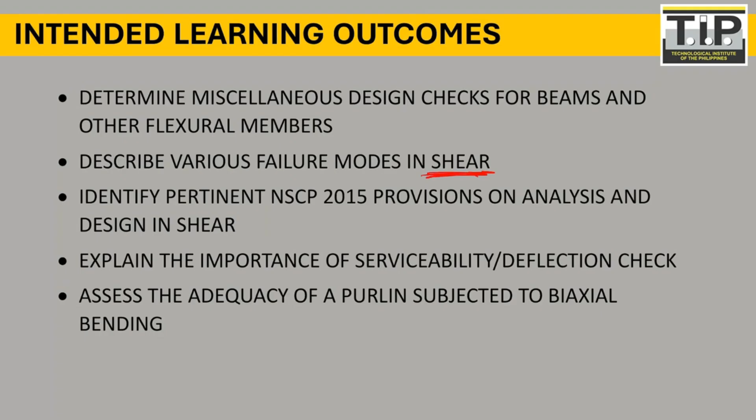The next one is to describe various failure modes in shear, so we're going to talk about shear. Next is to identify pertinent NSCP 2015 provisions, as usual we're going to refer to NSCP 2015 on the analysis and design of beam shear.

We're also going to explain the importance of serviceability and deflection checks, and talk about serviceability and deflection. And lastly, we're going to talk about how to design.

This is a very important topic. We're going to talk about how to design a purlin, specifically how to design the purlin in a simple house, basically yung nilalagay natin, roof purlin. Since most of you will be designing a simple house, kung nag-design kayo ng bahay, kailangan niyo ng design ng purlin, no?

So let's talk about shear in beams. When a member is subjected to bending, kapag nagkaroon tayo ng bending stress, the longitudinal fiber of the beam actually experiences shear stress.

So what do I mean by that? If we imagine the bending of the beam, from this straight beam it will bend downward, tama po ba? Then if we look into the fiber of the beam, this beam is actually having a shear on top. We have compression at the top and tension at the bottom, right?

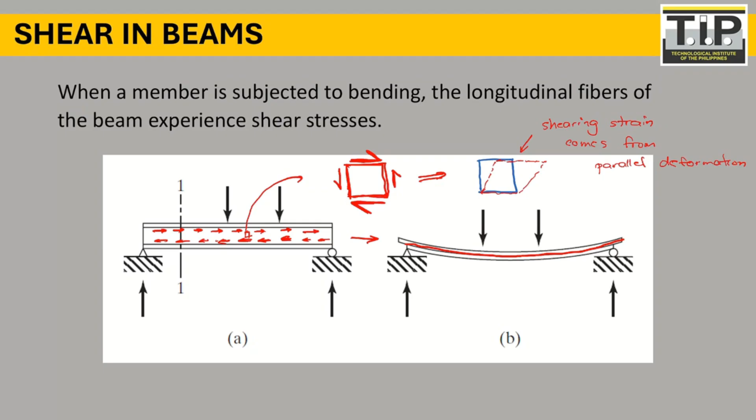Comes from parallel deformation, so it means that your deformation is actually parallel to the application of force. So yun po yung nangyayari sa shearing, that is what happened in our fiber. So if you get that one little fiber, one square fiber in a longitudinal beam, your beam is actually trying to rotate, the fiber is trying to rotate, which causes shearing, yun po yung tinatawag natin na shearing, no?

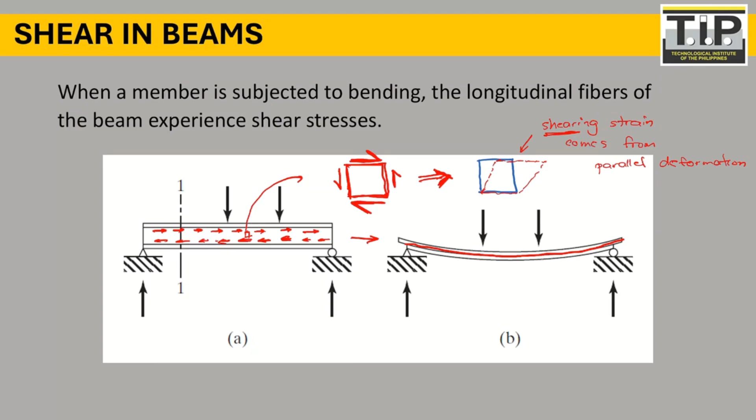So when your beam is subjected to bending, your beam is also subjected to shearing, subjected din po tayo sa shearing. As I've said, if you get one fiber, this will be the fiber, and your fiber is rotating, wants to rotate. You have a horizontal shear and you have a vertical shear.

So of course you know na kapag meron tayong beam, you can draw the shear diagram, right? For example, for that type of beam, this is your shear diagram. So since you know that when you have a beam you can draw the shear diagram, coming from the shear diagram you have a shear force.

So if you have a shear force, you have a shearing strain, ganun lang naman po. Tama? We can relate it to mechanics of materials. So if you have a shearing force, you have a shearing strain. So shear oriented horizontally and vertically are actually equal. So what does it mean? You have a horizontal shear, this one, horizontal shear, and vertical shear.

But as you can see, they are actually equal because they are trying to rotate the member—not the member, a fiber of the beam. So they are trying to rotate the fiber. The vertical shear is trying to rotate it clockwise, coming from vertical shear. And for horizontal shear, it's trying to rotate it counterclockwise. So the fiber is in equilibrium. We need to maintain equilibrium, so it's trying to rotate counterclockwise.

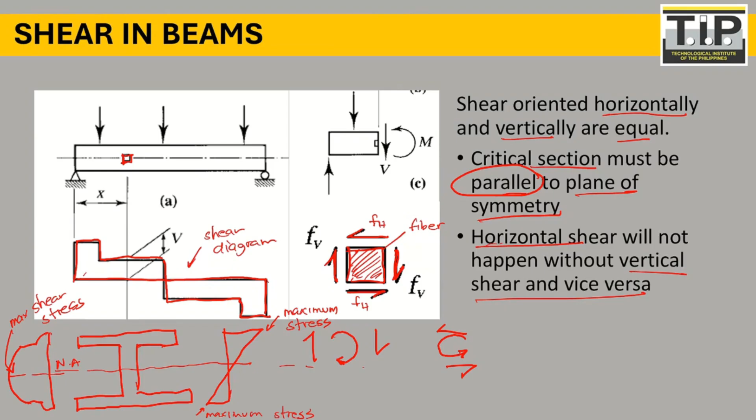So in our mechanics of materials, according to mechanics of materials, our formula for shear is actually given as VQ over IB. This is your general formula. Do you remember this formula? Can I have a confirmation—do you remember this?

Di ba nung mechanics of materials, tinuro sa inyo MC over I. Kasabay po ito ng MC over I, di ba? VQ over IB. Hindi nyo maalala?

Okay, so anyway, if you don't remember, let's have a review in your mechanics of materials. So according to mechanics of materials, simple mechanics lang po, our general formula for shearing stress is actually given as VQ over IB. That is your general formula. And what is V? Basically coming from the force, this is your shear force.

Q, what is your Q? Q is the first moment of area from the neutral axis—first moment about the neutral axis, the area of the cross-section between the point of interest and the top or bottom of the cross-section. So that's the first moment of area. Again, that is the first moment about the neutral axis of the area of the cross-section between the point of interest and the top or bottom of the cross-section.

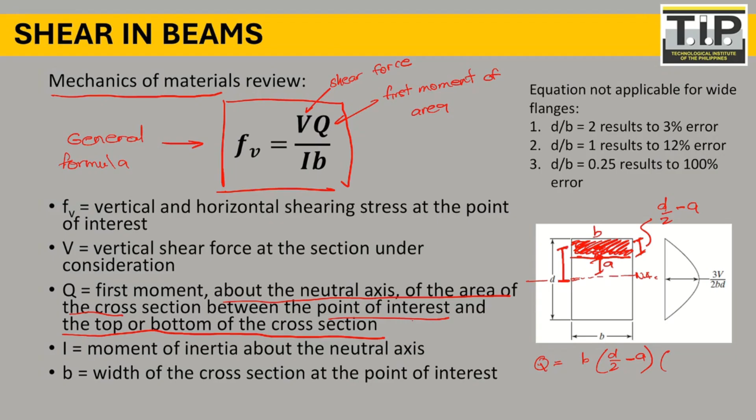So that is the area multiplied by the distance from the neutral axis, coming from the centroid of this area going to the neutral axis. So that will be, let's say, A plus D over 2 minus A, over 2—sa gitna po nung area, at the middle of that area. So you just need to take the moment coming from the neutral axis.

I will be the moment of inertia about the neutral axis. So this is the moment of inertia. B will be your width of the cross section, the width at the point of consideration. So that is our general formula coming from mechanics of materials.

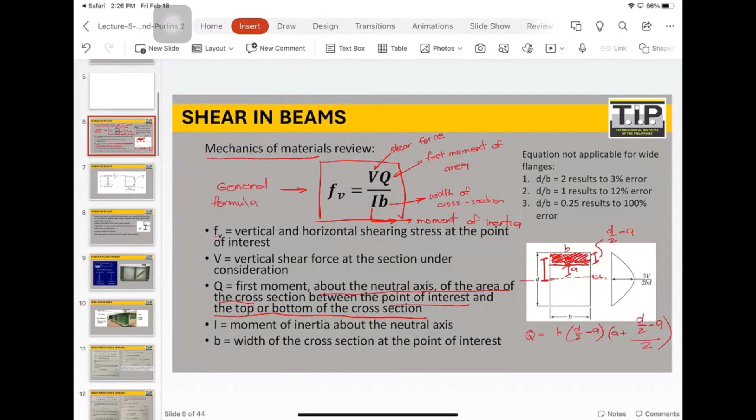I will elaborate more since you don't remember VQ over IB. Let's have a simple example so you can understand the use of the formula. You will also use this in mechanics on the board exam, so formulas like MC over I and VQ over IB are very important.

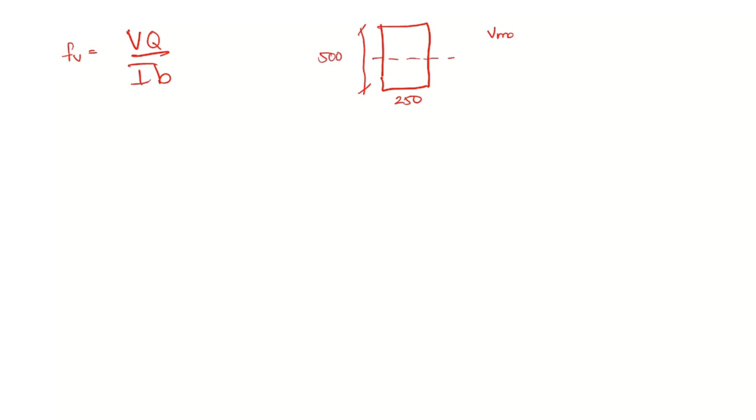So let's have a simple example. Let's say this is 250 and this is 500. Let's say Vmax, or your maximum shear, is 500... actually that's too high, let's lower it.

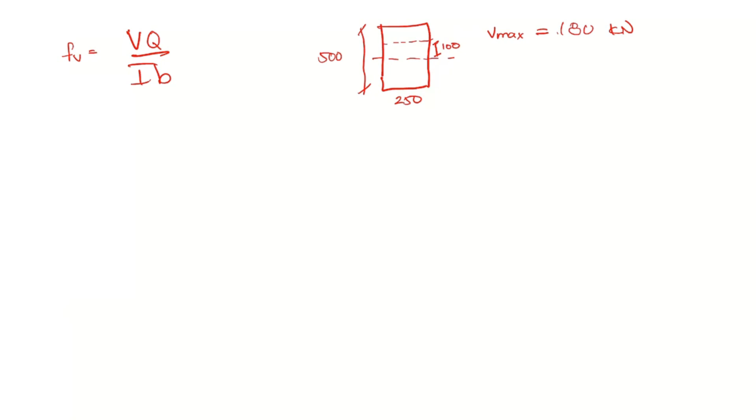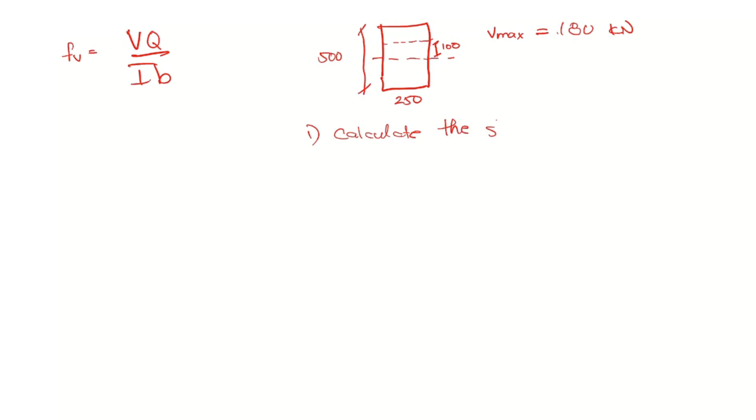Let's say 180 kilonewton. So calculate the stress at, let's say, 100 mm from the neutral axis. First, calculate the shear stress 100 mm from the neutral axis. How do you calculate that?

Let's calculate: FV is equal to VQ over IB. Our maximum shear, V, is 180 times 10 raised to 3. This is a review of mechanics of materials. What is Q? We take the moment of area. Let's say this is 500, this is 250, and we take the moment of area of this section.

If that is 100 mm from the neutral axis, what remains of this distance? 250 minus 100 equals 150. So we have 150 here. Q will be 150 multiplied by 250 — this is the area. Then we take the moment from the neutral axis: what is the distance from the centroid of that area to the neutral axis? That will be 100 plus 150 over 2.

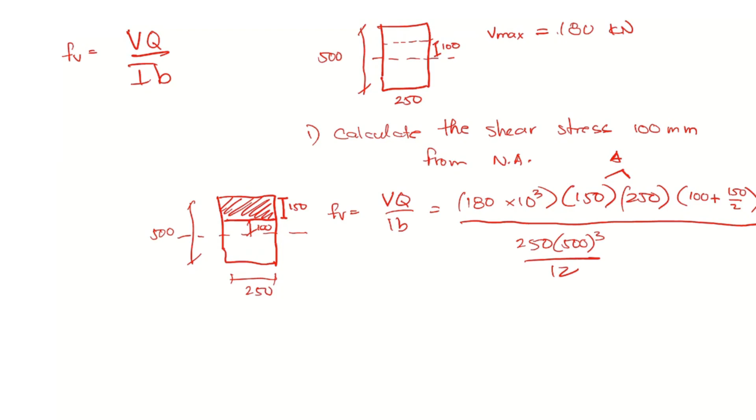Are we understanding this? Okay, again this is mechanics of materials. Then divide by I. What is your I? Moment of inertia, B H cubed over 12. Multiply I by B, the width — what's the width? 250. So that is how you calculate the shearing stress.

What's the value? The answer is 1.8144 megapascal. So again, this is a review, I'm just reviewing it with you.

Number 2, let's calculate the maximum shearing stress. If that's how we calculate the shearing stress, where do you think is the position of the maximum shearing stress?

Where will we have the largest Q? That is at the neutral axis, correct? At the center, so that is correct. If we take the moment at the center, we get the maximum shearing stress. So let's calculate the maximum shearing stress, which will be at the center.

So if this is 500, this is 250, we need to get the maximum shearing stress. That will be FV is equal to VQ over IB. What's our V? 180 times 10 raised to 3 to make it Newton.

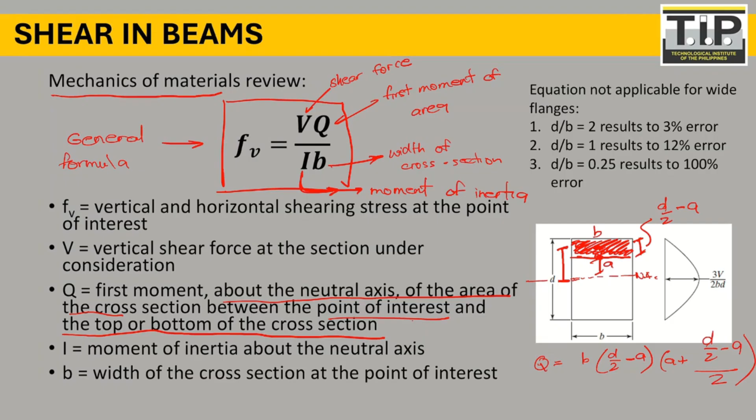Okay, so that is actually the general formula in determining your shearing stress. So that is your shearing stress. So how about for steel? That is for mechanics of materials. How do we relate it for steel?

Anyway, before we move on, if your maximum shearing stress is at the center, what do you think is our shearing stress at the extreme fiber? What is our shearing stress at this point? Let's say at the ends. What's our shearing stress at the ends? We have 0. Sir, bakit 0?

Kasi sa dulo po, wala na siyang kinakapitan. Wala na siyang i-rotate, kasi yun na yung dulo eh. So wala nang magka-counteract. That's why at the ends, your shearing stress is 0.

That is in comparison, kapag kinumpare niyo naman sa flexure stress, ang flexure stress niyo at neutral axis ay 0. Tama? Kaya nga po, in a beam, the maximum flexure stress is at the ends, but the shearing stress is 0. And on the other hand, the maximum shearing stress is at the center with a corresponding flexure of 0. So, ganun po.

Okay, so going back to steel design, how do we relate our formula for VQ over IB in terms of steel design? So FV is equal to VQ over IB, and since our common steel member is I-beam, for simple beams, we have a W shape or a wide flange shape.

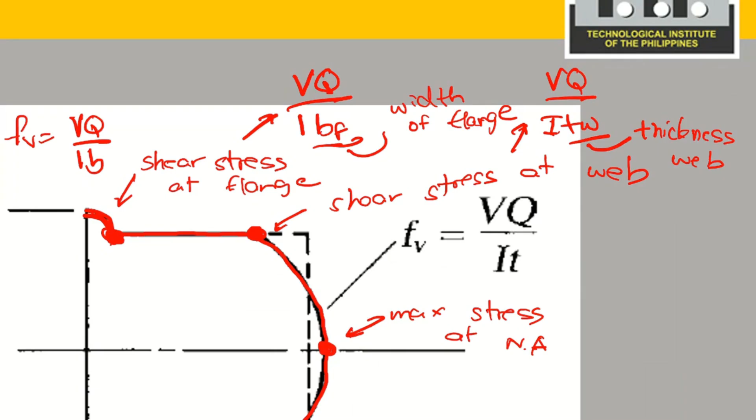That is why if you calculate for, nakikita po ba? So that's why if you calculate for the VQ over IB, you will have a very small stress at the flange and a very large stress at the web. Is that clear? Because of the B. So if we are going to calculate the capacity, the capacity is coming from the stress. Tama po ba? So I think we now understand that the capacity is coming from the stress multiplied by area.

Tama? So if we're going to see this stress part, you can notice that most of the shearing stress is carried by the web.

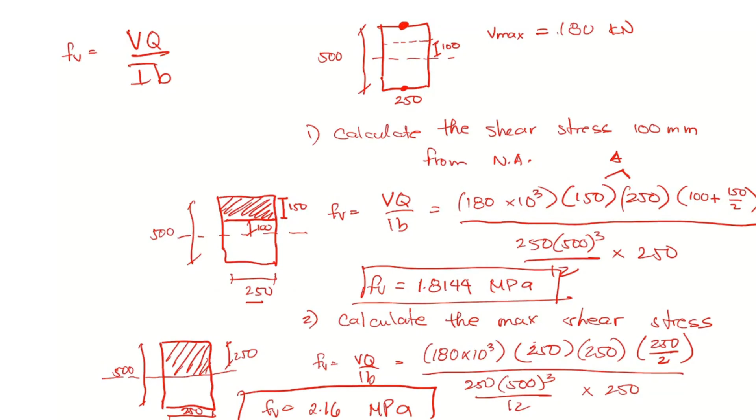So the shearing stress is mostly carried by the web, because it has a very large shearing stress in comparison to the flange. So that is why in steel design, what we did is to get the average stress, because it's a long calculation to get VQ over IB. So we get the average stress instead. How do we calculate the average stress?

We make it as a rectangle, we make it as an average. And to get the average shearing stress, we can just use the formula: shear divided by the area of the web, assuming that all of your shear will be carried by the web. So shear divided by area of the web - that is how we get the average shearing stress. The term for this is your average shearing stress.

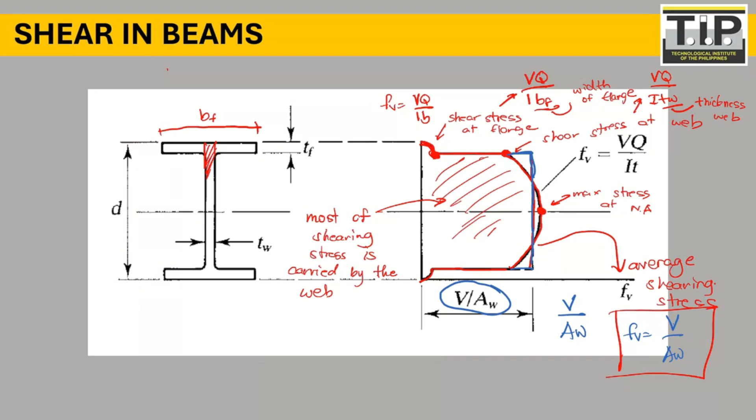Again, how do we calculate average shearing stress? Shear in the web divided by area of the web. So that is by approximation that most of your stress is actually carried by the web. How do we calculate the area of the web? This is the area of the web - area of the web is basically D times thickness of the web.

But take note, where this formula came from is your general formula, VQ over IB - you just get the average. You just took the average shearing stress. And the average shearing stress is given as VQ, FV is equal to V over area of the web. Okay, so are we clear with that? That clear? That is because most of your shearing stress is actually carried by your web, no?

So going into shear of beams - shear is not exactly a problem for steel beams, since significant shear forces can be resisted by the web. So because of the web part, we have a large capacity for shear, resisted by the webs in rolled shapes.

However, very large shear values may be observed when certain conditions occur. These are some of the examples when you have large shear values. If you have a large shear value, your member or your beam can fail in shearing. So this is the time when your member can fail in shearing.

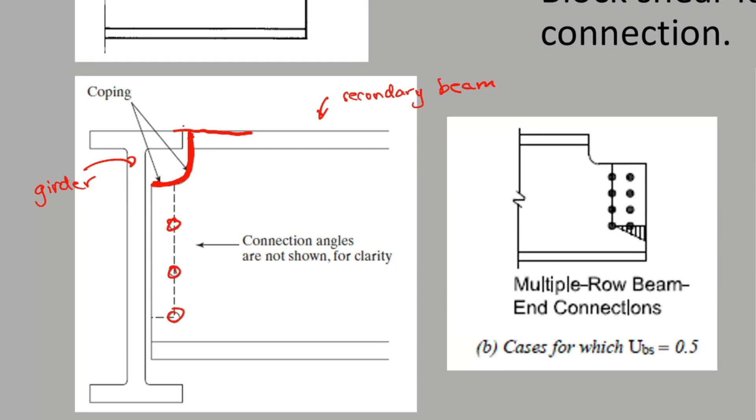What you're going to do to have a connection, for you to connect the secondary beam into the main girder, you need to notch the beam. What does notch mean? You cut into the beam - you cut it in order to, or you do coping on it, coping is the term, in order to connect your beam by bolts. So in that case, this is actually critical for shear - critical for shear.

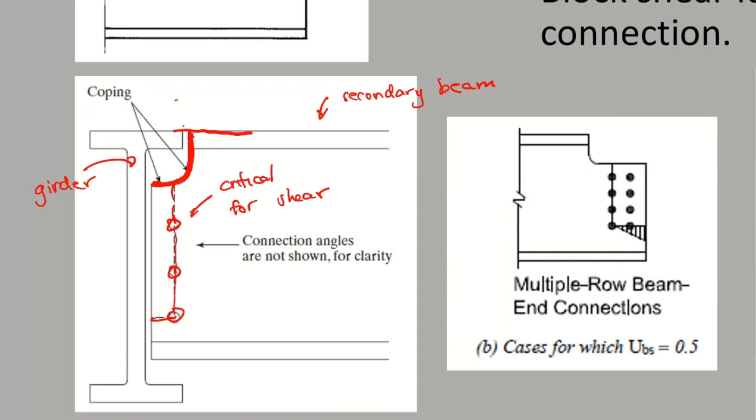This is not a fixed connection. A fixed connection, again, there's a difference between a fixed and a hinge connection. In steel design, a fixed connection is when the web and the flange are connected. When flange and web are connected, that's a fixed connection. On the other hand, shear connection is when it's web-to-web only. This is shear connection. On the other hand, the rigid connection I showed you earlier is actually a fixed connection.

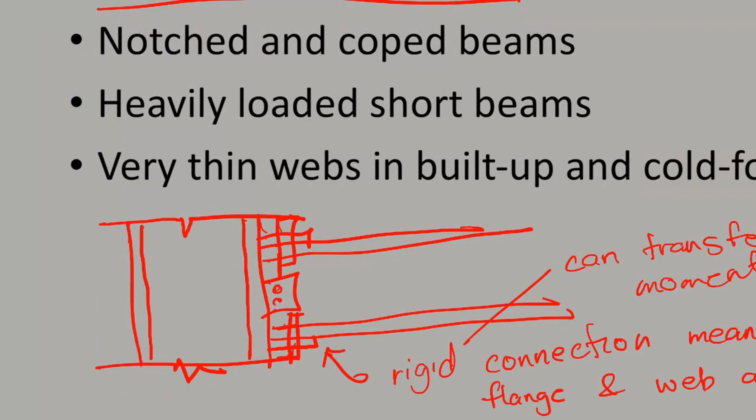So that is a notch and cope beam. We also have heavily loaded short beams. When your load is large, you will also have large shear. Lastly, if you have very thin webs, because the web carries your shear, a thin web means a small capacity for shear, so that will also be critical.

So what does shear failure look like? Basically, what you will see is yielding. We already know what yielding is, we've explained that several times. Yielding is just deformation. When we say yielding, it doesn't mean it will break. Yielding just means it will have a large deformation. So this is yielding.

On the other hand, it can have local failures. For local failures, it will have web buckling. When we say web buckling, the web will buckle, it will bend. We are now familiar with the word buckling. When we say buckling, it is a lateral deformation. On the other hand, web crippling is when a very small part of the web will actually undergo deformation, and that is called crippling.

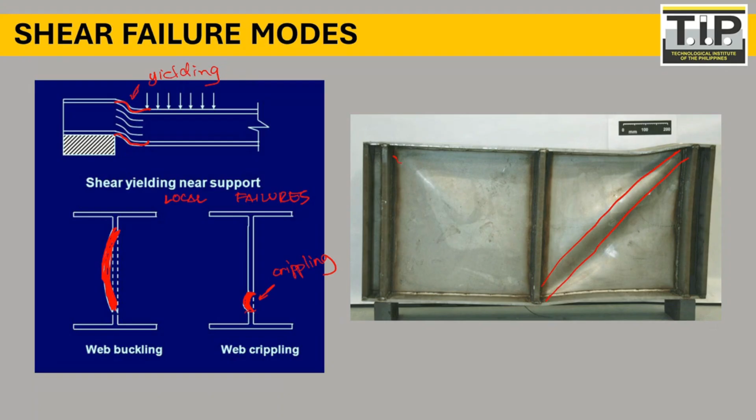So why is it diagonal? Because if this is your support, the tendency of the shear or the tendency of the load is to transfer diagonally. That's why our failure mostly comes diagonally.

So that is an example of web buckling. That is your web buckling.

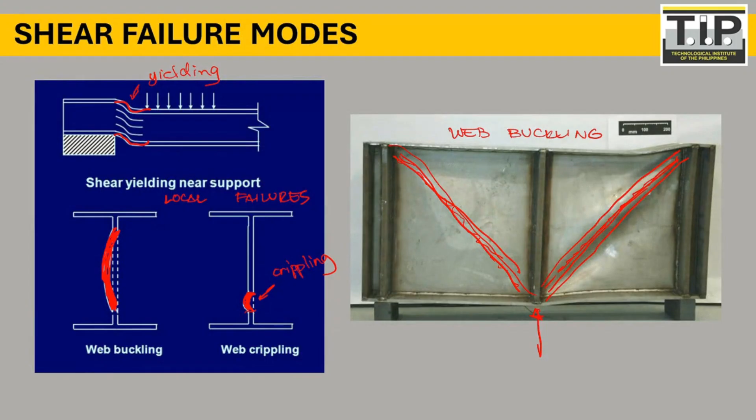In order to avoid the buckling of the web, as you saw earlier, what we do is provide stiffeners. You can see this - these are what we call web stiffeners. We are providing stiffeners that will act as support for your web. Because if you have a web stiffener, you will have a smaller brace length. Do you remember brace length when it comes to buckling?

Yes, so we are actually applying a web stiffener. Our web stiffener will actually avoid the buckling of your web. So those are web stiffeners.

So again, the web is the main carrying part of shear. On the other hand, if you're going to talk about flexure, in flexure the main carrying part is the flange. So the flange carries flexure, the web carries shear. So they're like connected together.

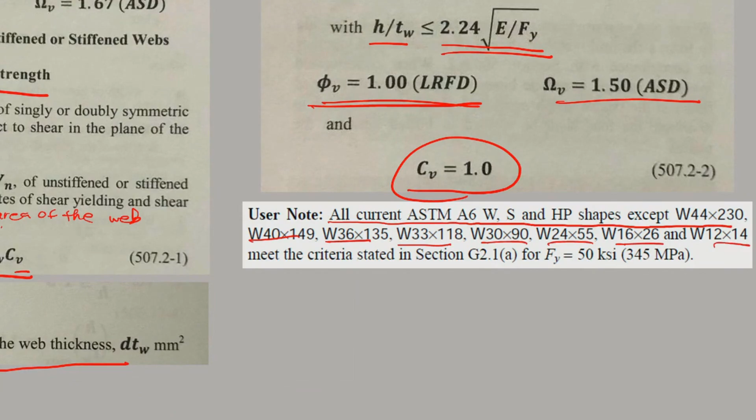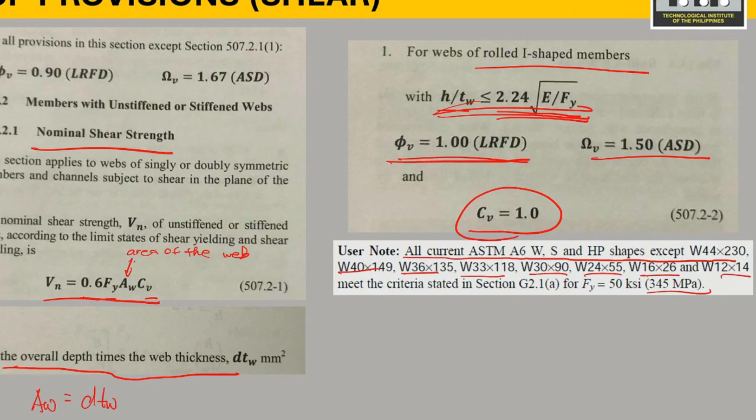However, according to the AISC, all current ASTM W shapes except the following given members meet the criteria stated in G2.1 for Fy equal to 345. So most of the time, your webs of rolled I-shaped members actually satisfy this criteria: H over thickness of the web less than or equal to 2.24 of square root of E over Fy. Most of the time, it will satisfy that criteria.

So for allowable stress design, ASD, your V allowable shear strength is equal to 0.6 Fy A web CV over 1.5. Which will give you a factor of 0.6 over 1.5 — that will be 0.4. Am I right? 0.4. So 0.4 Fy area of the web CV.

So again, if I ask you in your quiz, what is the percentage of Fy? The allowable shearing strength is taken as what percentage of Fy? The answer is 40%, no? So ganun lang naman po yung tanong ko. I think wala nang nagkamali nung second quiz.

So the answer in that quiz is 40. That if you encounter that question, 40 po yung naging sagot. So in this case, 40% kapag shearing.

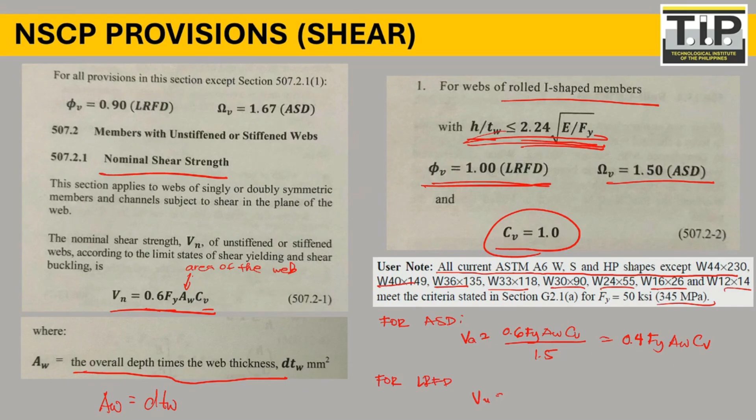On the other hand, for LRFD, let's complete LRFD. Your ultimate VU will be 1.0 multiplied, so that will be 0.6 Fy AW CV. Because your LRFD factor is 1.0.

So for provisions in this section, except 507.2.1, if it's not falling into this criteria, if it's not falling into H over thickness of the web less than 2.24, then you need to go into this section. Here, your reduction factor will be 0.9 and your factor of safety will be 1.67.

So the nominal shear strength is actually the same. Your nominal shear strength is taken as 0.6 Fy area of the web CV, and for webs, the web plate buckling coefficient KV is determined as follows. But first, let's look into this: for webs of all other doubly symmetric shapes, singly symmetric shapes, and channels, except round HSS, the web shear coefficient is determined as follows.

If your H over thickness of the web is less than 1.1 square root of kV E over Fy, then your CV is 1.0. How do you calculate kV? You refer to this: for unstiffened webs with H over thickness of the web less than 260, your kV is 5, except for the stem of T-shapes where kV is 1.2.

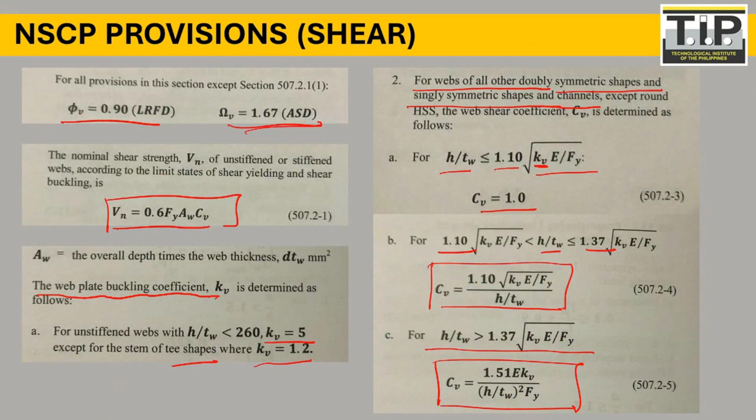Otherwise you will use 0.9 and 1.67. If hindi po nag-govern dito, then you will go to 0.9 and 1.67, and then you need to calculate for CV in terms of this formula. Otherwise, if it's not falling into this criteria, then you need to refer to this criteria. 0.9, magbabago po yung reduction nyo sa factor of safety. That will be 0.9 and 1.67.

Are we clear? Okay. So usually we are falling into this one, usually we are falling into webs for 1.0 and 1.5. However, if not, refer to this table, or to these formulas.

So, okay, step 1 po tayo. Verify shear yielding. So, verify if your H over thickness of the web is less than or equal to 2.24 of square root of E over Fy. So we are going to verify if we are going to fall into this criteria, case 1.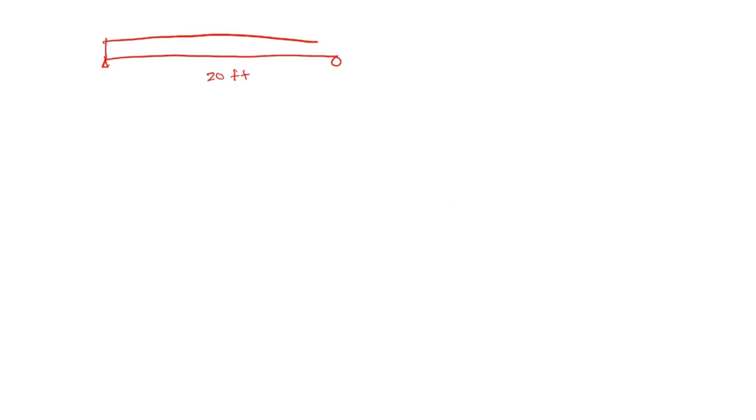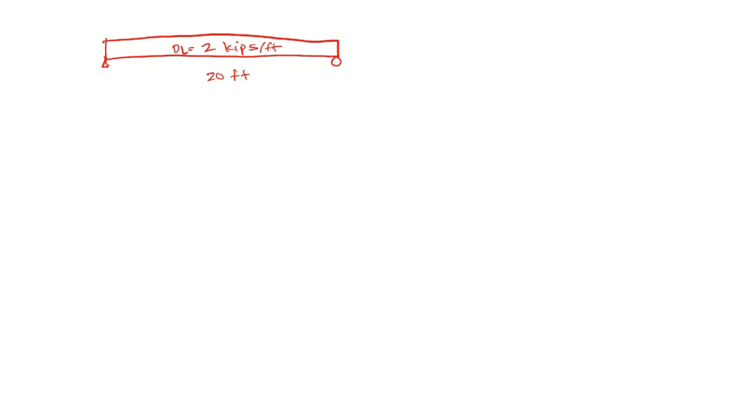So if you're going to calculate what is the maximum uniform load that it can carry, maximum uniform live load that it can carry, this is 20 feet. And it's already carrying 2 kips per feet of dead load. That is dead load, right? Dead load. And we need to calculate for live load. We need to add live load. And the question is, what is the maximum live load that you will add?

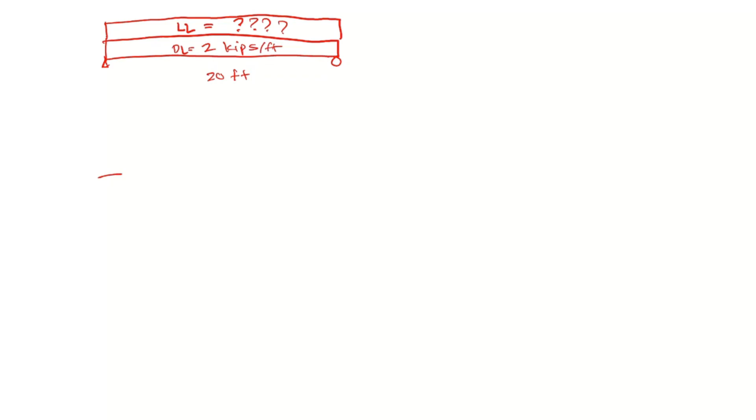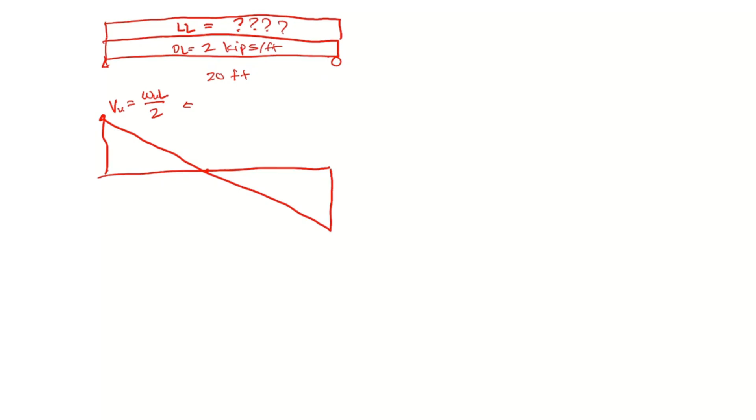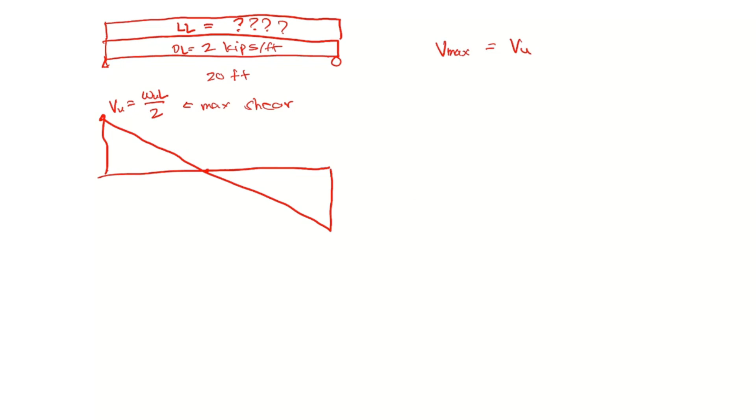So with that, we know that the shear diagram is actually this. And the maximum shear is at the support, which has a value or a formula of WL over 2, right? That is your maximum shear, max shear. So given the capacity that we calculate, 234, I will equate the maximum shear, Vmax, is equal to Vu that we calculated. So Vmax is WU L over 2 equal to 234. That will be equal to WU. L is 20 feet divided by 2 is equal to 234. I can now calculate for ultimate uniform load.

What's this one? 23.4 kips per feet. This is your factored uniform load. Take note, this is factored because this is LRFD. So if you want to calculate for the live load only, we know that WU is equal to 1.2 dead load plus 1.6 live load.

So the uniform factored load is equal to 23.4, is equal to 1.2 times the dead load, 2 kips per feet, plus 1.6 of live load. So how much live load can it carry? 13.125 kips per feet. So this is your live load.

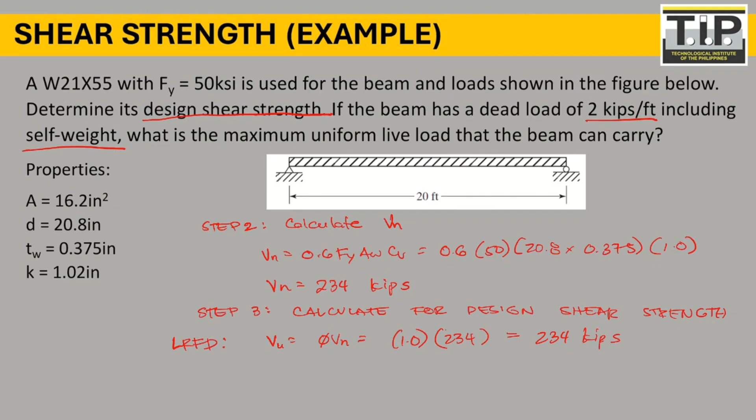Sir, what if there's a beam weight? What you need to do is add the beam weight here. Because in this problem, the 2 kips per feet already includes the self weight. But if you have a separate beam weight, that's a good question. So if you have a beam weight, you just add it to the 2, self weight plus 2, add self weight to the dead load. And then calculate for live load.

This is actually what I'm asking in your quiz. In the quiz, I gave self weight, I gave superimposed dead load. What you need to find is live load, the unfactored live load. So this is the process, this is what you need to do there.

But that is one advantage of using steel. We have a very small weight of the steel. That is why we use steel, because it has a very small weight, almost 14 Newtons. Actually, even if you neglect the weight of the beam, it's almost negligible. But the correct solution will be to use the weight, to add the weight. Always consider the weight.

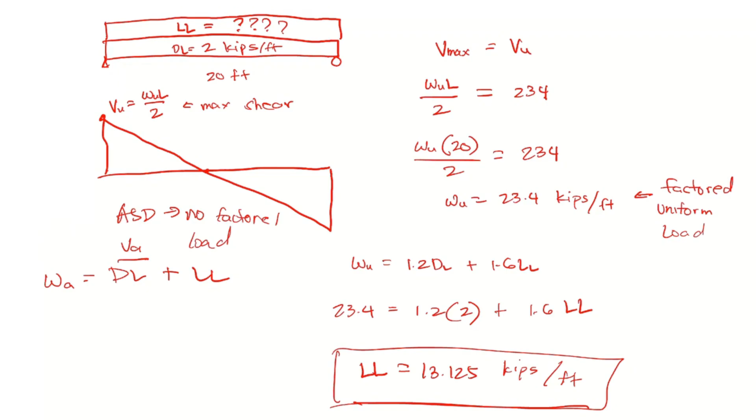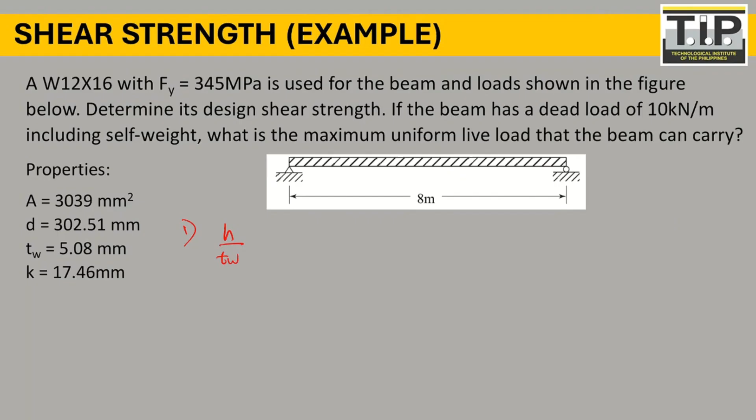So step 1, verify if shear yielding. Check H over thickness of the web, should be less than or equal to 2.24 square root of E over Fy. So H over thickness of the web, that will be 302.51 minus 2 of 17.46, divided by thickness of the web 5.08, should be less than or equal to 2.24 of square root of 200,000, since this is metric units, divided by Fy 345. What's the first value? This one?

This is 52.68. Should be less than or equal to another one. This is 53.93.

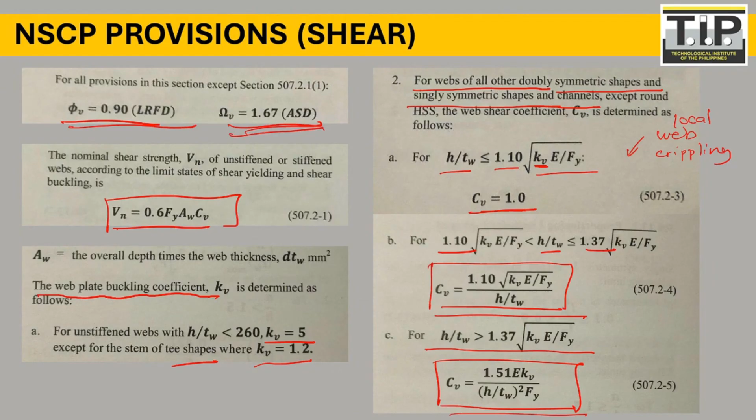Again, if your h over thickness of the web does not satisfy this first equation, you refer to this other equation, and your phi factor will be 0.9 with a safety factor of 1.67. So if it does not satisfy this equation, you use that instead.

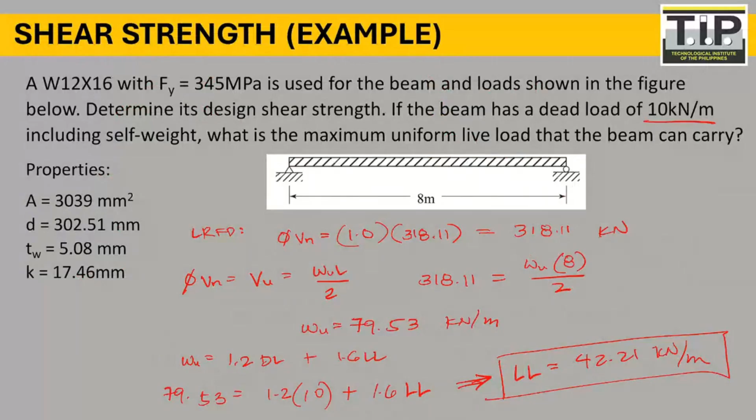Okay, so next topic will be block shear for coped beams. As I explained, most of the time when we are connecting secondary beams into the main girder—when I say main girders, these are beams that are connected to the column, those are girders. When we say beams or secondary beams, these are beams that are connected to another beam. So let's draw that.

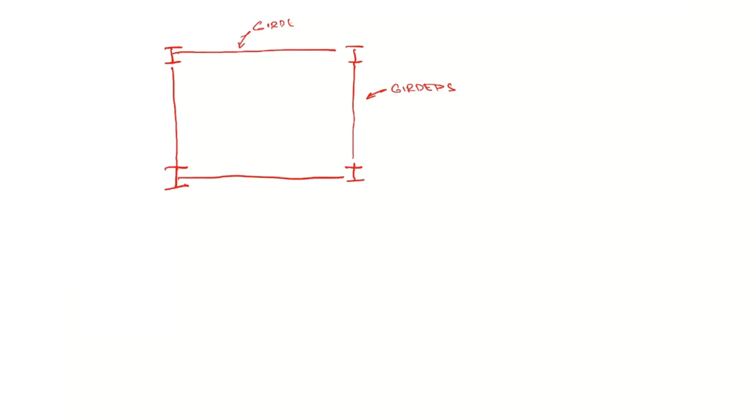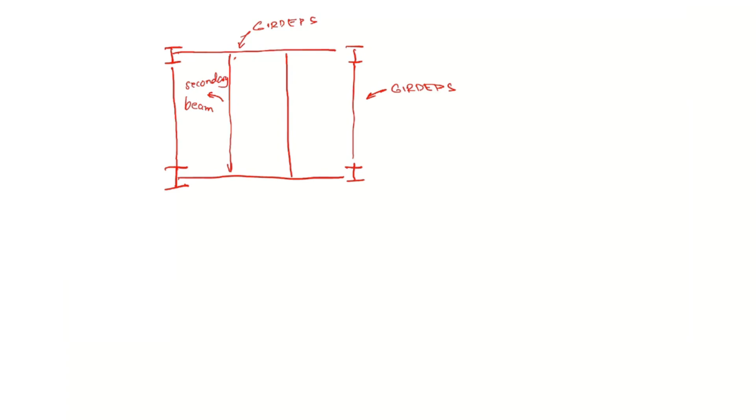Let's say, for example, you have a column, an I column, and then you're going to connect the two. The beams that are connecting the columns, these are called girders. On the other hand, we are also providing a secondary beam—these are called secondary beams. So we have the girder, we have the secondary beam, and the connection of the secondary beam to the primary girder. This connection right here is actually a pin connection.

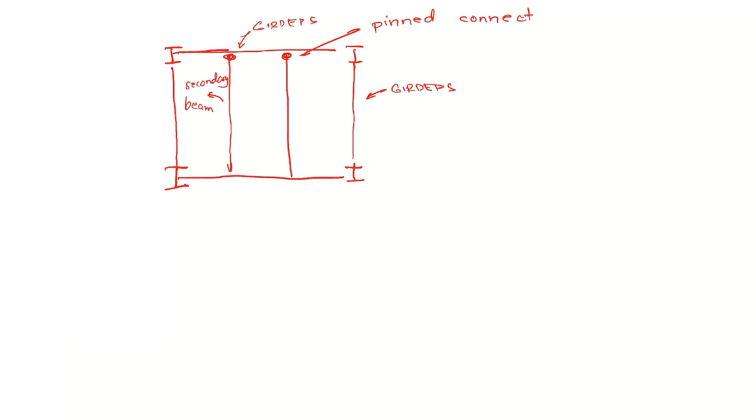When we say pin connection, it means that only shear will transfer. Pin connection does not have a capacity to transfer moment. Pagka sinabi naman natin fixed connection, that is the connection that is able to transfer moment. Are we clear? That is pin connection.

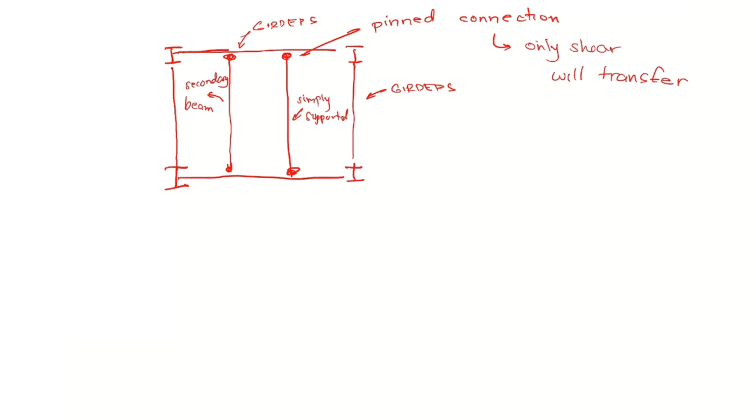So if you are going to design a secondary beam, usually even for example in a parking lot or small buildings, the secondary beams are pin-pin connection. It means this beam is actually simply supported. Why is it simply supported? Because your moment at the ends is actually zero. So in the future, if you're going to perform an ETABS modeling, for example in your capstone, you need to release your beam at these points because for secondary beams, these are pin connections—you are only transferring the shear.

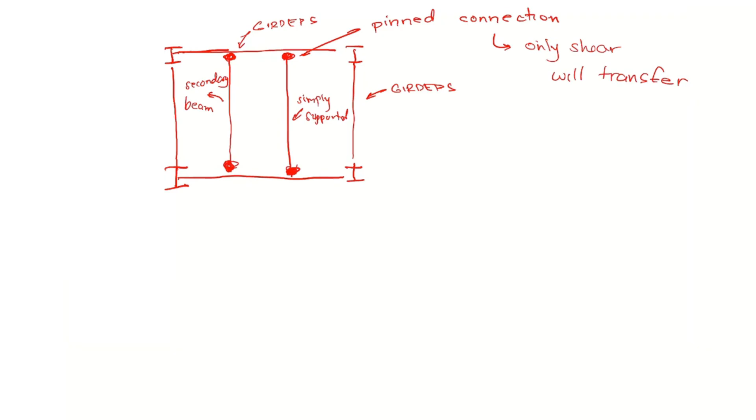So kapag pin connection, the connection is like this—you're only connecting web to web, you are not connecting the flanges. So that's the difference between a moment connection and a shear connection. Shear connection, you only connect the web. Moment connection, you are connecting both the web and the flange.

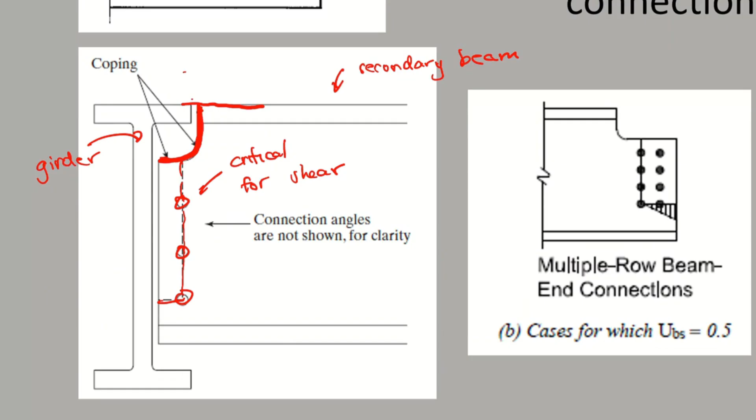Okay, so next, at beam-girder joints where the surface of the top flanges are flush—meaning same elevation—so your secondary beam is actually flush with the top flange of the main girder, the connecting beam needs to be coped. Ito po yung tinatawag natin na coping. So block shear failure is a possibility in the joint connection. It means that if you are going to cope the beam, you will mostly fail in block shear.

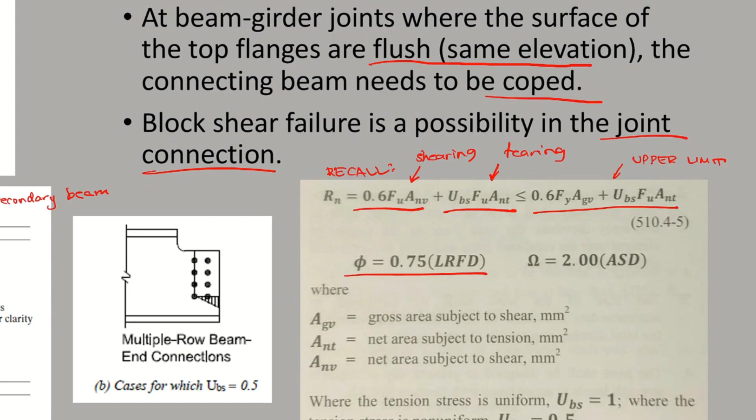Your member is critical for block shear, so let's recall block shear from module number 2: 0.6 FU ANV and ANT. Block shear is composed of shearing and tearing, and this is your upper limit. As we learned in module 2, our phi factor for LRFD is 0.75, and our factor of safety for allowable stress design is 2.0. And UBS, where tension stress is uniform, your UBS is 1.

If you have a single row of bolts, your UBS is equal to 1.0. Otherwise, if you have a multiple row end connection, your UBS is equal to 0.5.

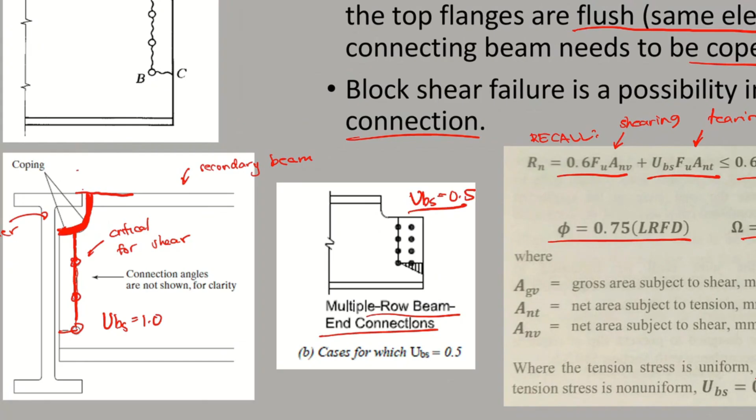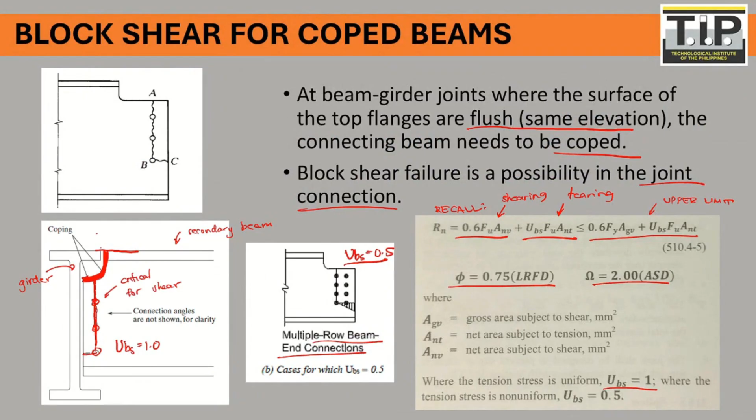So we are familiar on how to calculate the tension area and the shear area. We are going to use that again. Let's try to solve one problem.

Determine the maximum allowable reaction based on the block shear that can be resisted by the beam shown. What is the maximum point load that can be applied at the midspan of an 8-meter beam considering ASD? Web thickness is 0.3 inches.

Again, this is block shear failure considering a coped beam. So step 1, calculate the areas.

Let's calculate the area. First is the shearing, A and B. Your load will be transferred in this direction, so this is your shearing part, and this is your tearing part. So this is under shear, and this is tension. That will be your block shear.

We are using A992 steel, so Fy will be 50 KSI, and Fu is equal to 65 KSI. And we are going to consider that the bolt hole is 1/8 inches larger.

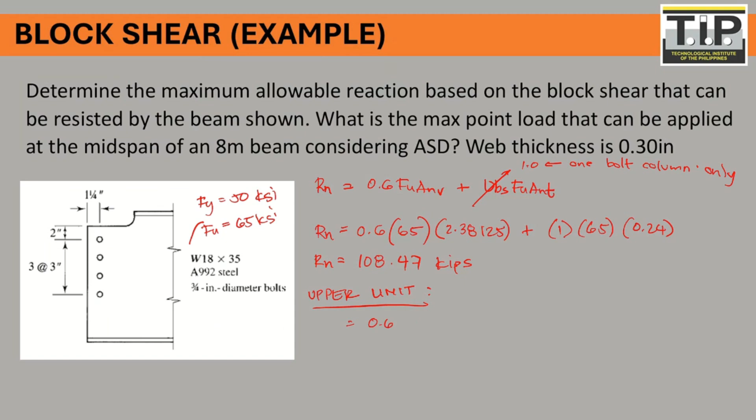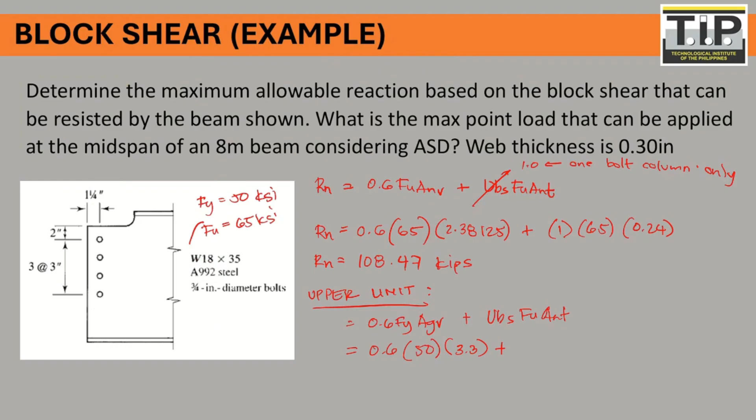That will be 0.6 of Fy. Let me write 0.6 of Fy AGV plus UBS FU ANT. 0.6 of 50 AGV is 3.3, plus 1 FU is 65 multiplied by 0.24. So what's our upper limit?

We have 114.6. So our Rn is actually less than 114.6. So this is okay.

So determine the maximum allowable reaction. Our allowable strength, P allowable, is equal to Rn divided by factor of safety.

We're going to use ASD. So we have Rn is 108.47 divided by the factor of safety, 2.0. So how much is that? 54.235 kips.

So this is your maximum reaction, your maximum reaction that can be carried, or the maximum force that can be carried in your member, considering block shear strength. That is your maximum capacity.

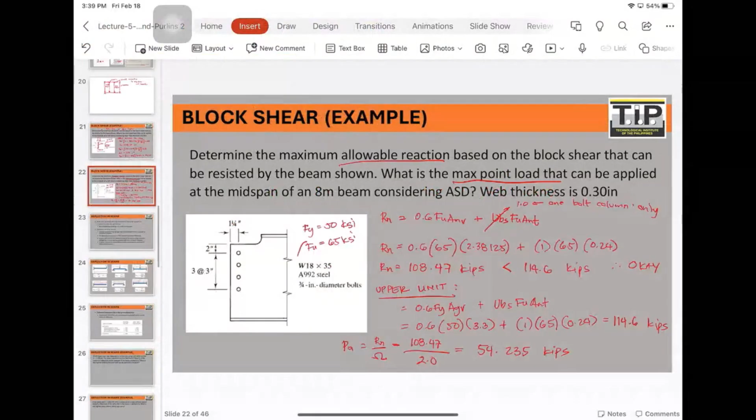So P allowable is 54.235. But the question is, what is the maximum point load that can be applied at the midspan? So if we're going to draw the beam, what we are asked is we are going to apply the point load P.

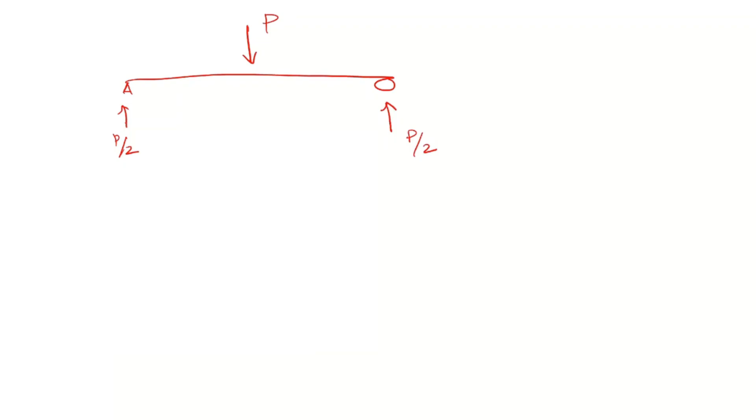And with that, we are going to have a reaction of P over 2, right? Because of your applied force P, you have a reaction of P over 2, left and right. And your maximum capacity here is equal to 54.235.

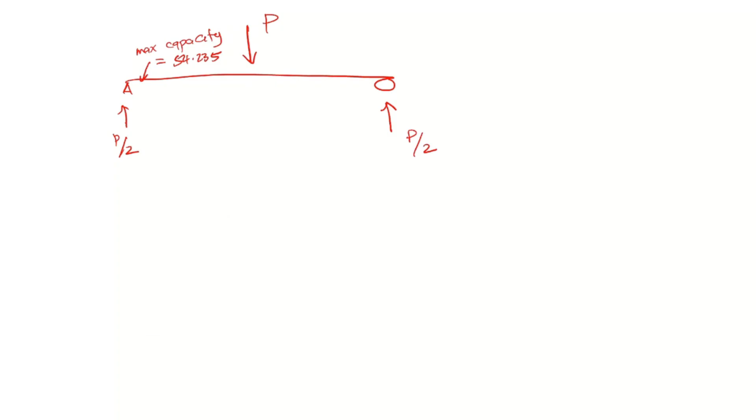So in order to solve for P, you need to solve for P. So max reaction is equal to P over 2. We need to equate that to the capacity, which is actually equal to 54.235.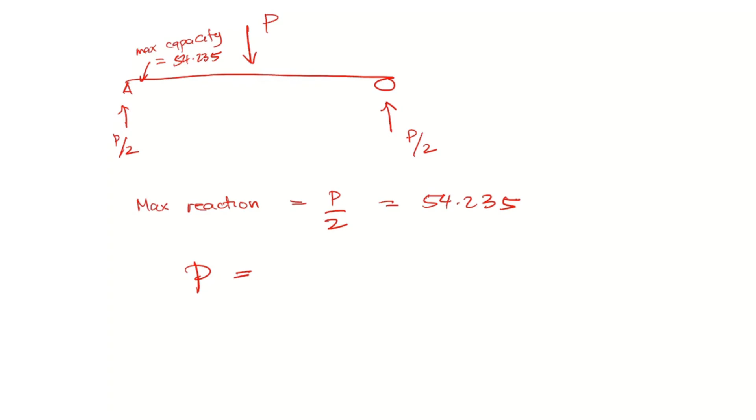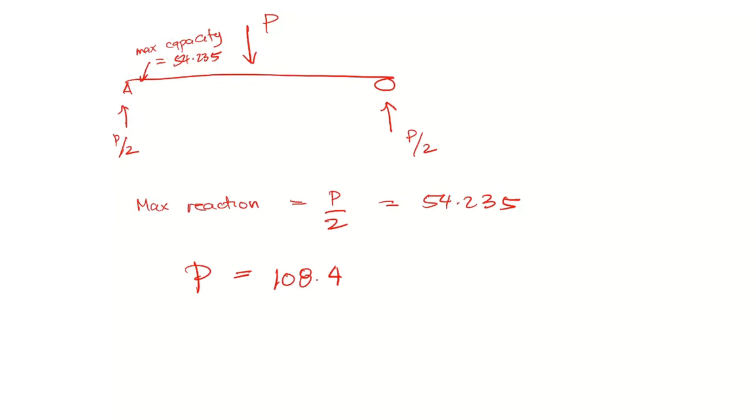So if we want to solve for the maximum P, what is the value? Multiply by 2, that is equal to 108.47. So the answer is 108.47.

Again, you need to read the problem. The question being asked is, what is the maximum point load that can be applied at the midspan of an 8-meter beam, considering allowable stress design? So since your maximum capacity is 54.235, equate that to the reaction. Your maximum reaction, P over 2. So solving for P, you can solve for 108.47. Are we clear with this problem?

Why does it go back to 108.47? In this case, we are using allowable stress design. We don't apply any load factor. So in allowable stress, don't apply any load factor.

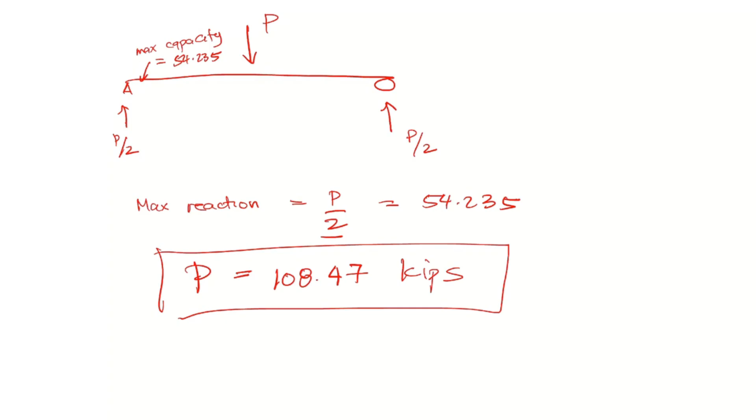Okay, so the next topic is deflection. So after reviewing block shear, we are going to go to deflection. So aside from ensuring safety by determining the design strength, what we've been doing so far is ensuring that our beam will not fail. It will not fail in terms of flexure. It will not fail in terms of shear.

So what we've been doing so far is ensuring that our beam is okay in the ultimate state. When we say ultimate state, it will not break, it will not fail. But we must also ensure that our design is serviceable. That is called serviceability design. So in order to make sure that your design is serviceable, you need to limit your deflection.

Actually, deflection is not critical. So as a structural engineer, when you see deflection, you don't immediately panic. You panic if you see a crack, if you see yielding, if you see failure. But when it comes to large deflection, mostly if you are an engineer with knowledge of the behavior of structures, deflection will not actually result in failure.

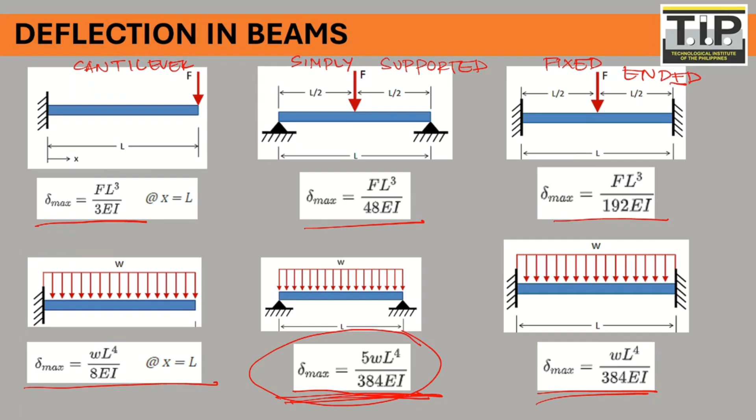So let's talk about the limitation for deflection. The deflection limitations fall into what we call serviceability design. When we say serviceability, I explained - serviceable po ba yung dinedesign mo? Serviceable. So are we clear with the deflection limits? We need to make sure that our deflection is less than the allowable deflection.

Regardless of ASD or LRFD, take note, this is very important. Regardless if you are using ASD or LRFD, for deflection calculation, you are going to use unfactored load. We are not using factored loads in deflection, always unfactored. For deflection calculation, we are always using unfactored loads, no? Unfactored. That is very important.

Next, these are the types of members and the limitations according to our code. For roof beam, if you are going to take the maximum live load deflection - when we say maximum live load, this is live load only. That is the deflection due to live load. For this one, this is the deflection due to live load plus dead load.

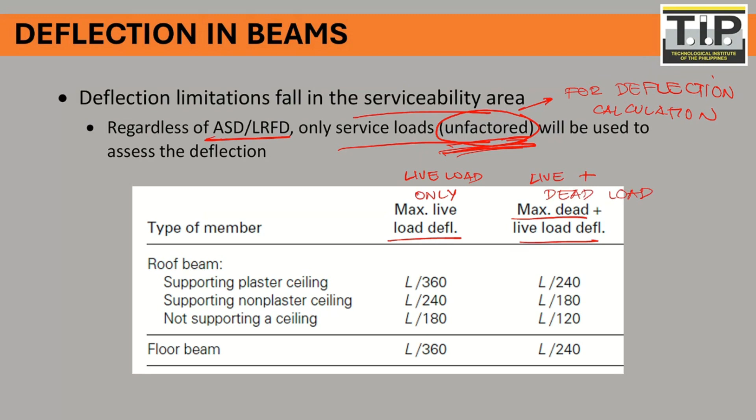So there's a different requirement for live load only. If you're going to get the live load only deflection, for roof beam supporting plaster ceiling, that is L over 360. As I've explained, this is important sa roof beam because if you have a large deflection supporting your ceiling, it will cause cracks - magkahiwa-hiwalay yung ceiling materials mo. Usually, if you use plywood for ceiling material and you have a large deflection, the connection of the plywood, maghihiwalay yung mga plywood mo, no? Kapag sa ceiling.

So it will destroy your ceiling materials. For non-plaster ceiling, L over 240. Not supporting a ceiling, L over 180. This is for roof beam. For dead load plus live load, you need to consider L over 240, L over 180, and L over 120.

This is very important for floor beam. For floor beam, our limitation for live load is L over 360. For live load plus dead load, that is L over 240. Are we clear with this one?

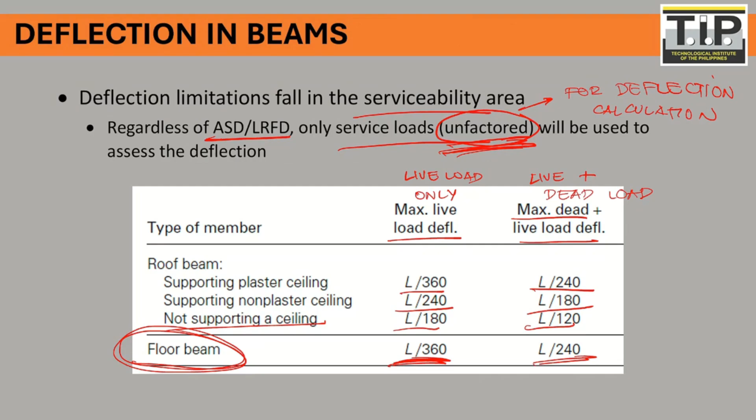So let's calculate. A 21 feet beam span was designed for a structure using a W24 by 55 section. You have the I of 1350. The beam supports a service live load of 3 kips per feet. Is the maximum deflection at the midspan of the beam satisfactory? What is the highest uniform live load that the beam can carry?

That can be carried by the beam.

So first of all, we have a simply supported beam with a uniform load. This is 21 feet, and the live load is equal to 3 kips per feet.

So first, we need to determine if it is satisfactory carrying 3 kips per feet. So we need to get the deflection due to live load. Since this is simply supported, the formula is 5WL to the fourth over 384 EI.

So calculating for the deflection, you have 5. Uniform load due to live load is 3. Again, for calculating the deflection, you need to use unfactored load. So multiply by the length of the beam span, 21 feet, WL to the fourth.

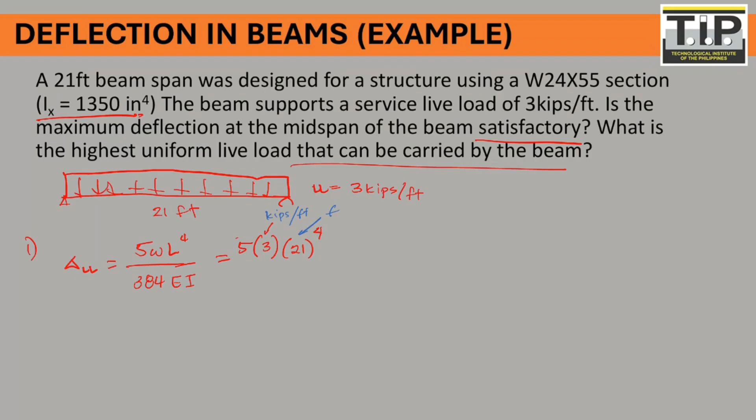But take note, this is in feet, so this is kips per feet, and this is feet raised to the fourth. So we need a conversion factor, converting it to inches by multiplying by 12 cubed, to cancel out one of the feet. This is our conversion factor from feet to inches.

5WL to the fourth over 384. E of steel when it comes to English units — our E of steel is 29,000 ksi — multiply by I, 1,350. So what is our deflection? That gives us 0.3353.

What's our limit? The limit for live load deflection for a floor beam is L over 360. So what's our limit? That will be 21 feet, converting into inches. So our limit is 0.7 inches.

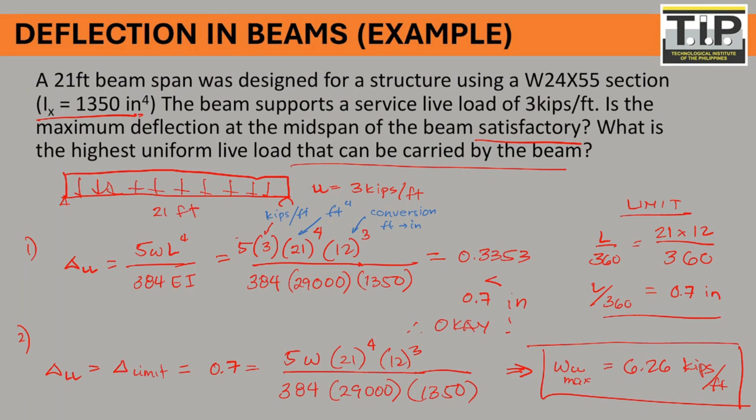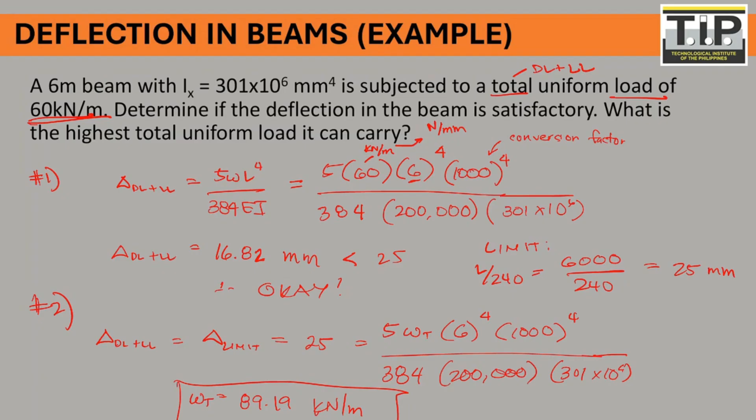Okay, so next one is cambering. So actually, curvature applied to a beam in the opposite direction of the deflection to limit sagging when subjected to gravity loads. We have a solution for deflection. Even though, for example, you have a very long span and upon computing, you will have a very large deflection, so there's still a solution. The solution is actually what we call cambering.

So cambering is actually giving an upward deflection. Ibig sabihin po ng cambering, binibigyan mo yung beam mo ng upward deflection. You are pushing your beam upward such that when it's on the site, when it's actually applied with the gravity load, it will go down and it will have a lower deflection. So if you are studying pre-stress concrete, it's the same as that one.

So what we are doing is in the factory where we are actually creating a cambered beam. So this is actually at the factory. So cambering is this one, camber. So at the factory, nakaangat po yan, nakaangat siya, such that if you're going to put it in the site.

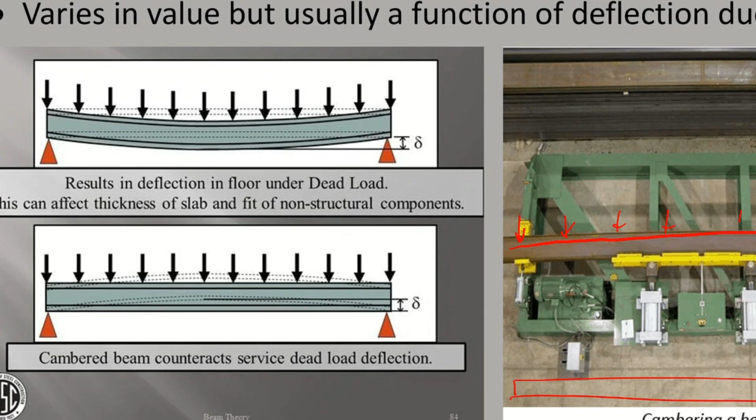deflection. So ang tawag po doon, cambering. So usually in steel beam, we have a camber. We have a camber po. And the camber is actually being designed by the engineer. Yung engineer mismo yung nagsasabi na, I want to have a camber of, let's say, 10 mm or 15 mm. You can request it in the factory, no?

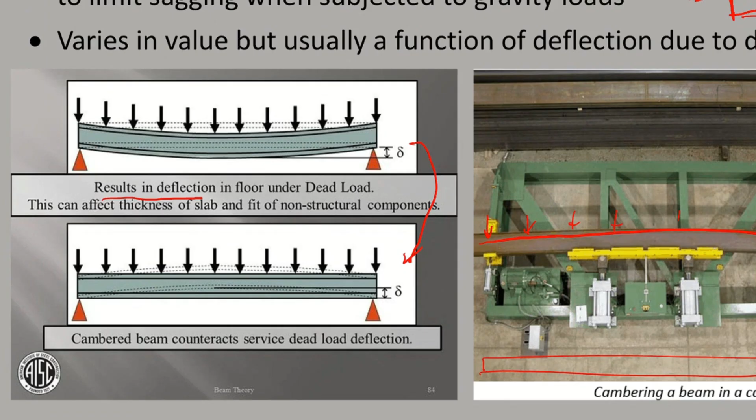So as you can see in these two comparison, this is the result in deflection in floor under dead load. So if you are going to remove the deflection due to dead load, because of the cambering, you will have a lower deflection. So due to cambering, you can remove the deflection due to dead load. So again, the principle of cambering is adding an upward deflection such that when you put it in the site, you will have a lower deflection. Kasi nga naka-curve upward na yung beam mo. Is that clear? Cambering.

It's the same as the one that you are going to use in, it's the same as pre-stressing, but this is for steel. For steel, the term is called cambering.